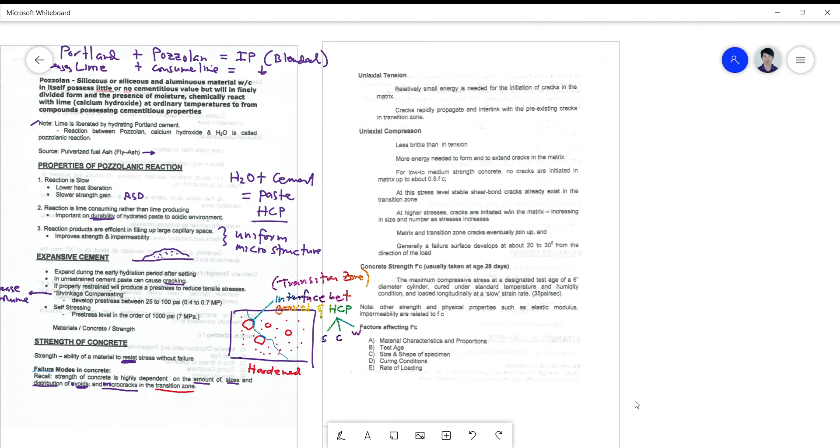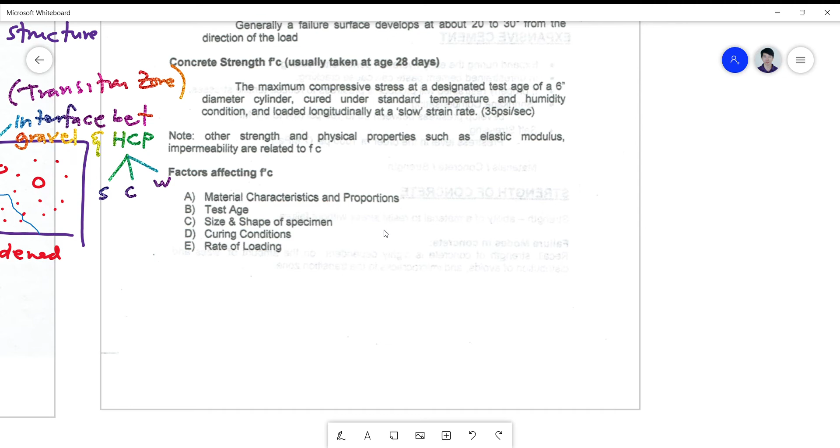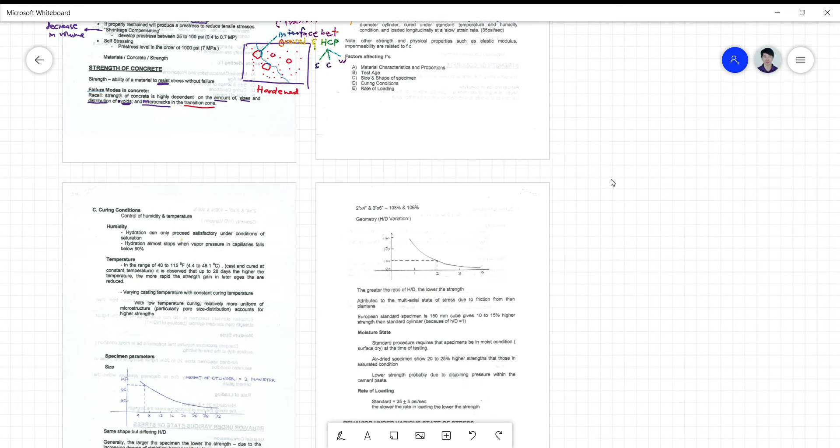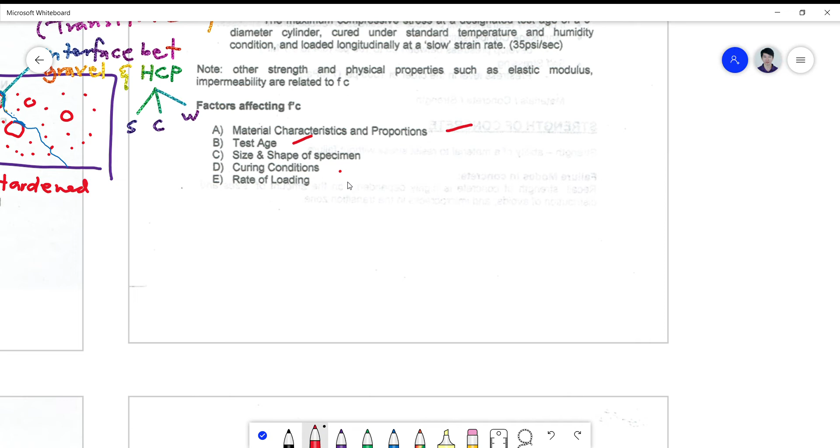Okay, last time we discussed the factors affecting the strength of your concrete. We finished up to the size and shape of your specimen, or rather the test age. We're going to discuss a few more on size and shape, but we have practically finished the material characteristic and proportion, and the test age. So we now continue on curing condition first, then discuss a little more on size and shape, and the rate of loading.

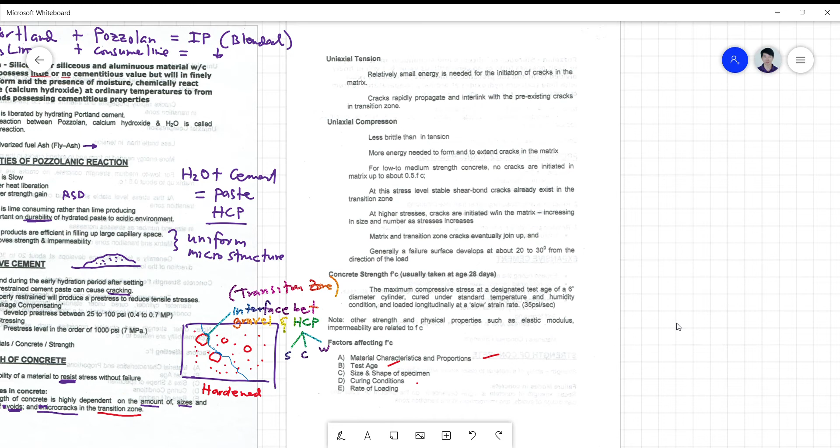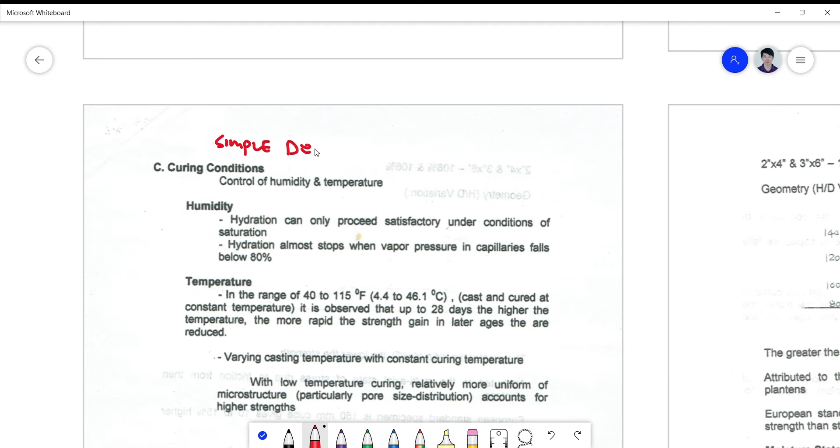So for the curing condition, in simple definition, we define curing as simply the control of both humidity and temperature.

On humidity control, our ideal humidity is 80 to 100%. For temperature, this varies depending on the temperature of casting and curing. So there are two types of temperature control we are into: the first on the casting, and the next on the curing.

Humidity in hydration must always be satisfactory, ranging from as high as 100% to a minimum of at least 80%, or else hydration stops. So hydration stops when it goes down. Curing uses a lot of water, that's why sometimes we don't pay attention to it.

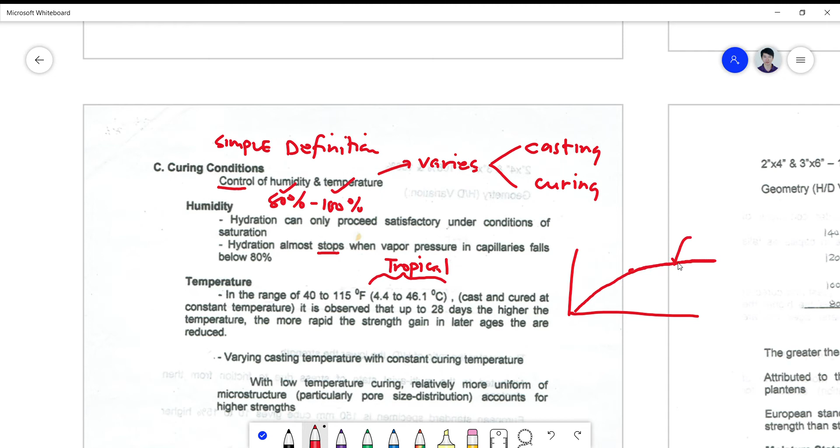In this temperature range, it is observed that up to 28 days, the higher the temperature, the more rapid the strength gain, but in the later ages this gain is reduced. So what does this mean? When we're at the upper boundary, there's a reduction in strength gain. If our graph for strength gain looks like this, at the later ages, the increase in strength gain is more rapid here, but then it goes down a bit. So this is strength versus time - that's how our graph looks.

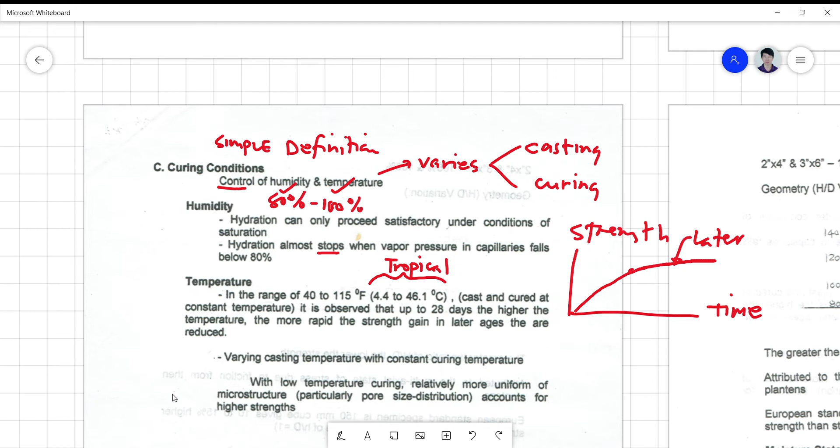So varying casting temperature with constant curing - these are problems in tropical climates when it suddenly rains. The temperature drops from a very high level to a somewhat lower temperature, but the difference is not that big.

So this is now your observation on the condition, where the temperature of casting varies while the curing temperature is set. Meaning your casting temperature is not the same, but when you cure it, you maintain a constant curing temperature - you have to see to it that during rainy seasons, your newly poured concrete must be controlled as far as temperature is concerned.

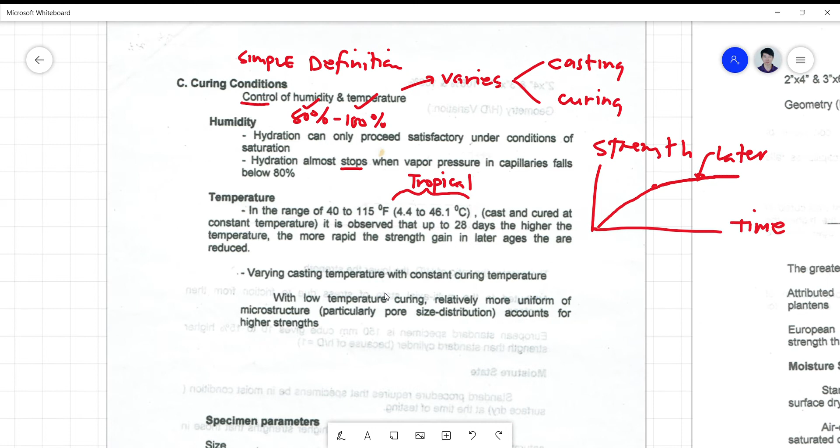With low temperature curing, a relatively more uniform microstructure accounts for a higher strength. So we prefer that our curing procedure is done in a cooler environment.

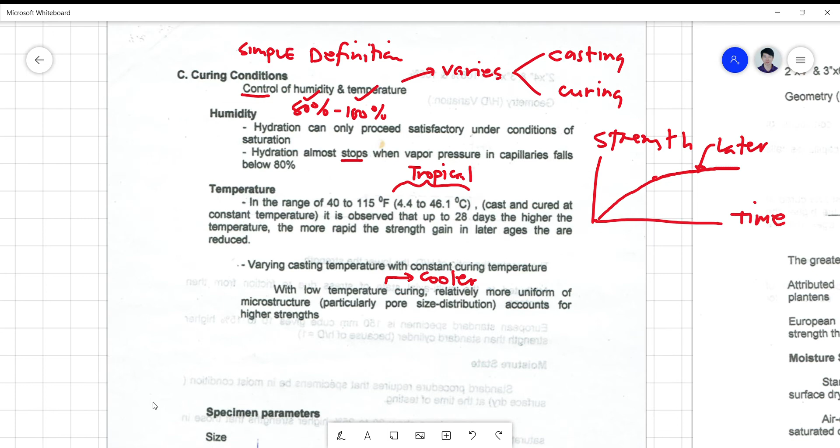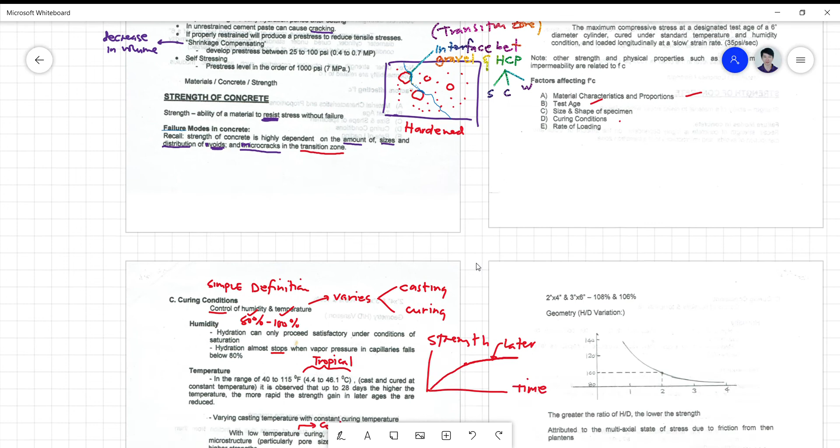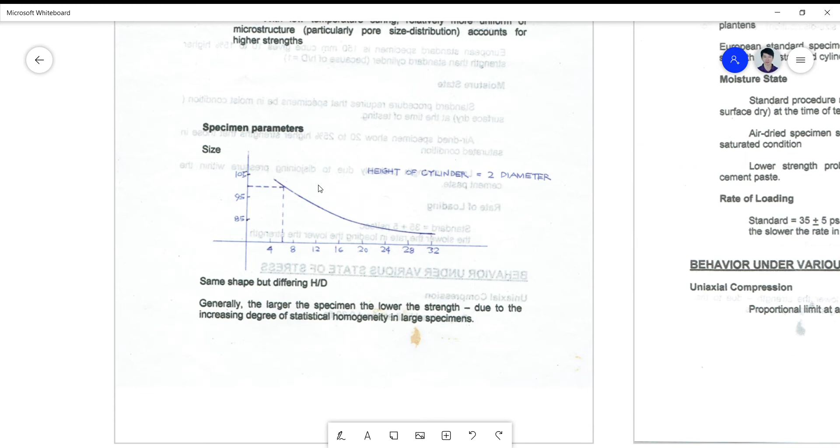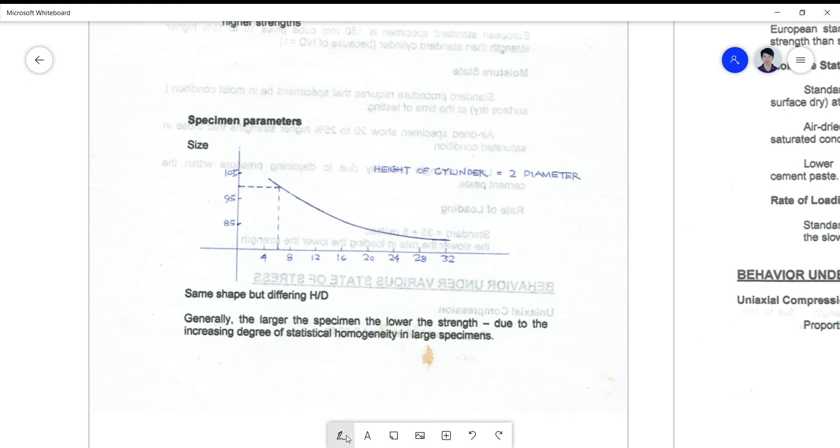Let's go back to the part we haven't discussed yet on the size and shape of our specimen. We're now on shape - we only discussed size earlier, and that was just the general part, under material characteristics. We haven't gotten to the size and shape of the specimen yet. For the size and shape of the specimen, we're talking now of the laboratory sample we are preparing. Normally, the specimen is a cylinder with height equal to 12 inches and diameter of 6 inches.

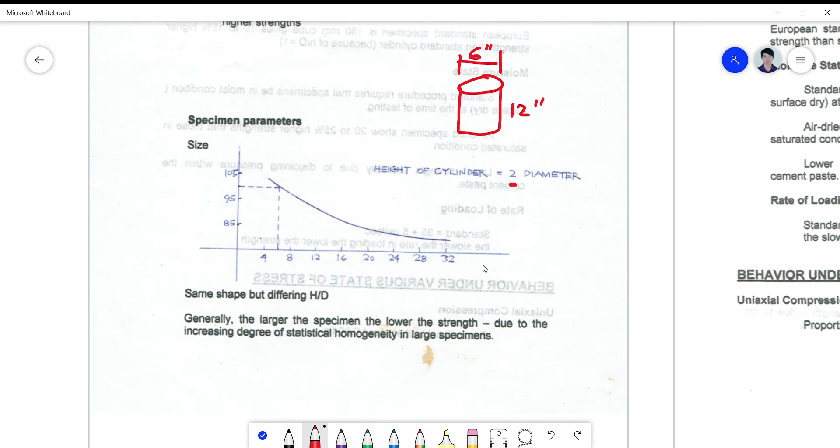So if we look at the size, this is now the standard: 12 divided by 6 is 2, so it's 2 times the diameter. That's our standard. So if we look at the size, this is 6 inches diameter - this is the size or diameter.

When the diameter is increasing, the strength is decreasing. So if you want to cheat on the test, decrease your diameter, because that makes it stronger. So, same shape but differing H over D.

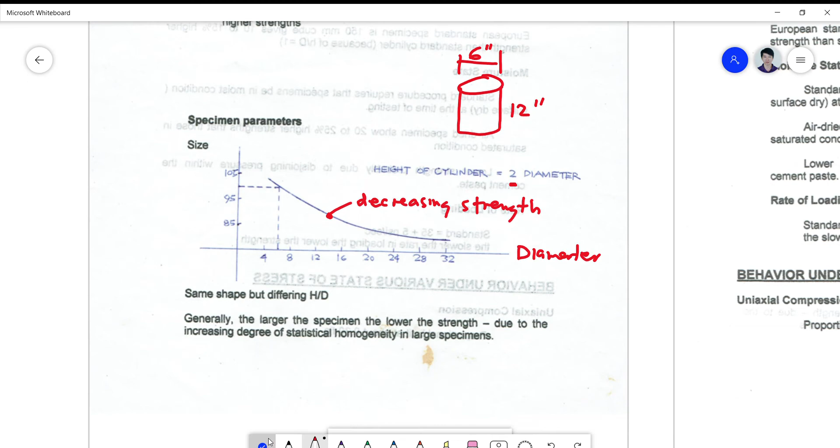Now we look at the ratio of H over D. The ratio here is 12 over 6 - this is our standard, so 2. Now this is H over D is 12 over 6, the cylinder is 2.

So if you test now on a cube where H over D is equal to 1, you expect a higher or stronger concrete specimen. The lower the ratio of H over D, the higher the strength. So a European 150 millimeter cube is 10 to 15% higher in strength than the standard cylinder because H over D is equal to 1.

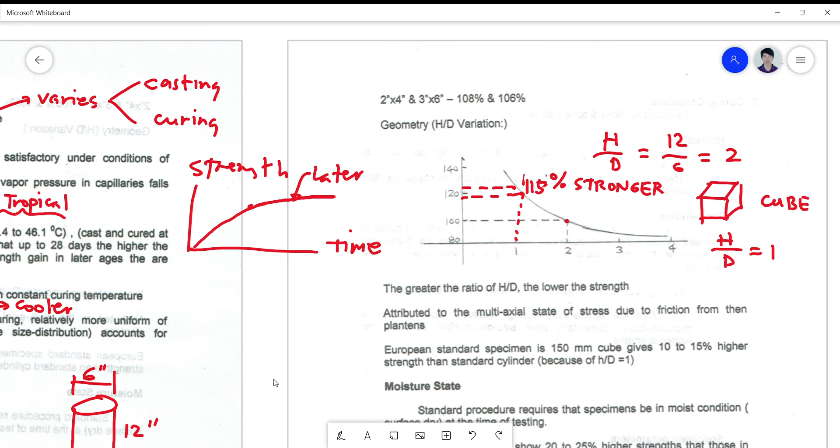Moisture state. Standard procedure requires that the specimen be in the moist condition, surface dry at the time of testing. When you say moist condition, it must be surface dry, but inside the specimen there is moisture. Air dried specimens show 20 to 25% higher strength than those in saturated condition. This is because of the pore pressure buildup - there's water pressure on this, causing higher strength.

When saturated, lower strength is probably due to the disjoining pressure within the cement paste. The rate of loading is 35 plus or minus 5 psi per second. So if the rate of loading is lower, it will lower the strength. If it is faster, it will increase the strength.

So slow rate of loading will decrease strength. When the loading is fast, it will increase the strength, and this is the standard. When you say slow, less than 35. When it is fast, greater than 35.

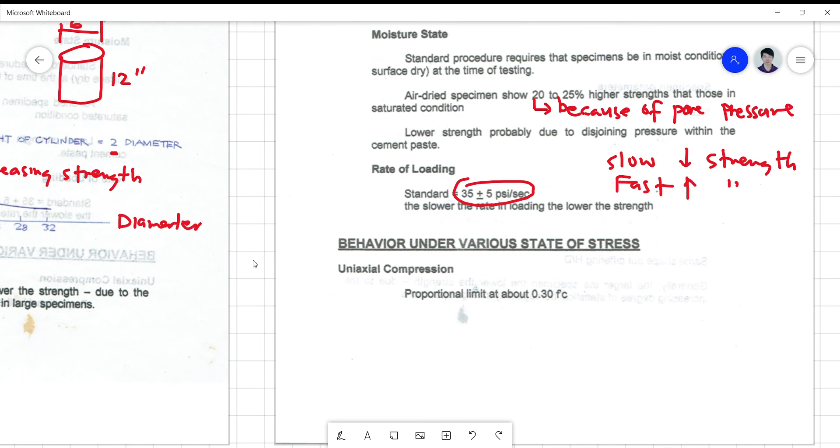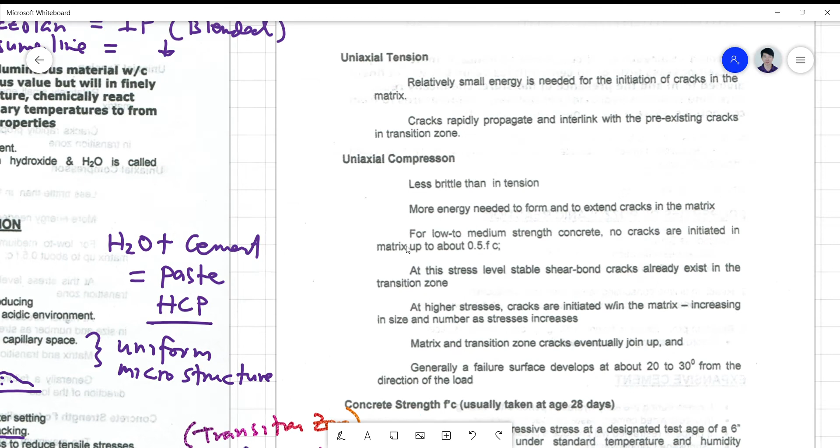So let's discuss now the behavior on the various states of stress. But before that, I'd like to present to you the uniaxial tension energy description. We know that concrete is weak in tension, but strong in compression.

So why? The reason is that the propagation of cracks is more rapid in tension than in compression, because there is already an initial crack. You need only a small amount of energy to initiate cracking of the matrix, so cracks rapidly propagate and interlink at the transition zone. For uniaxial compression, it's less brittle than tension because more energy is needed to form and extend cracks in the matrix.

For low to medium strength concrete, no cracks are initiated in the matrix up to about half of FC. So if this is your stress-strain curve, at 0.5 F prime C, cracks are not yet initiated, meaning there are already micro cracks in the transition zone and some capillary voids, but there are no force-inducing cracks yet within the matrix.

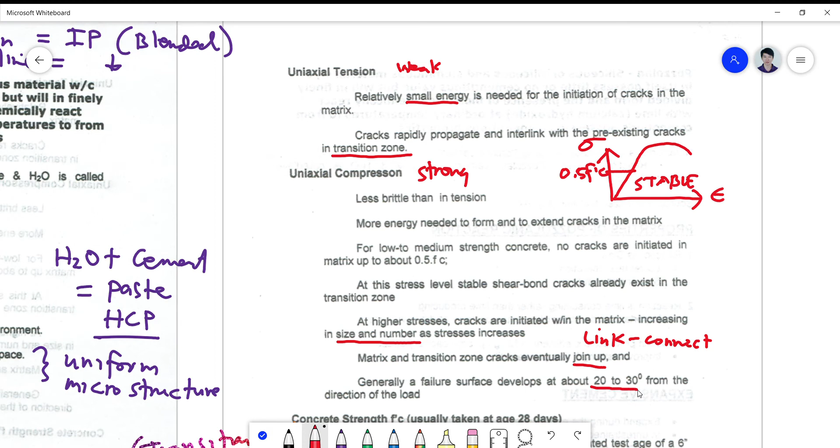So there is linking - interconnectivity, linking or connecting. Your micro cracks will connect with your transition cracks, your capillary voids will join, and suddenly a general failure surface will develop at around 20 to 30 degrees from the direction of the load. That's how uniaxial compression behavior emanates in the

test procedure. So concrete strength is usually taken at 28 days age. This is defined as the maximum compressive stress at a designated test age of a 6 by 12 cylinder, cured under standard temperature and humidity conditions and loaded longitudinally at a slow strain rate of 35 psi per second. Note that other strength and physical properties such as elastic modulus and impermeability are related to FC.

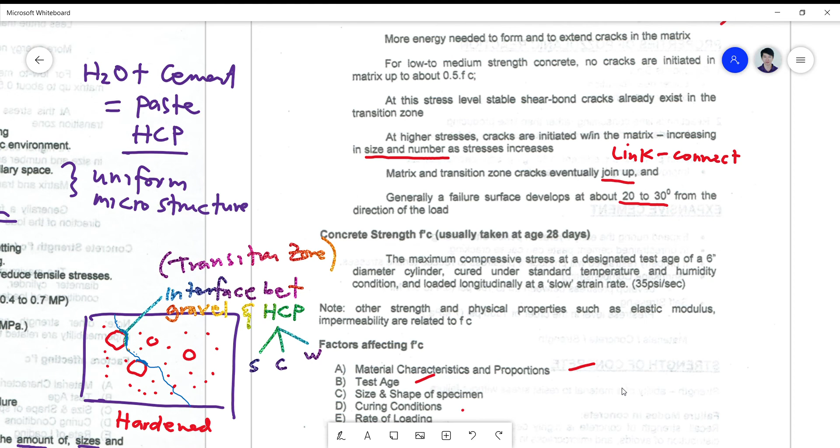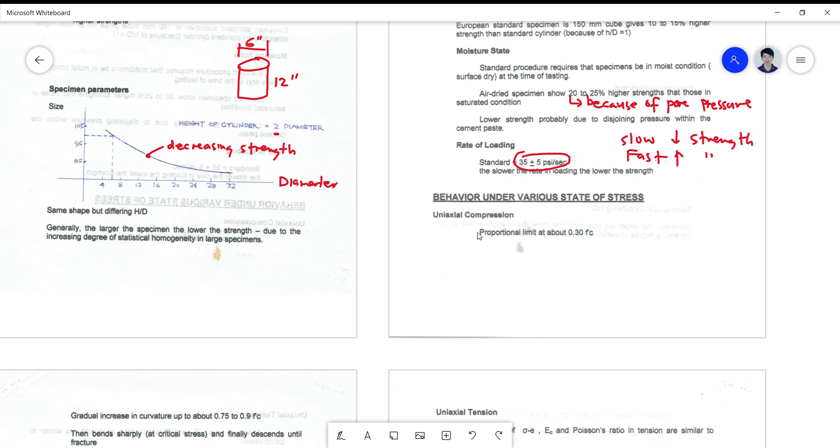Okay, so this finishes all the factors now of the strength of concrete. So let's move to our last topic, the behavior under various states of stress. So we focus more on the uniaxial compression. First, in the uniaxial compression.

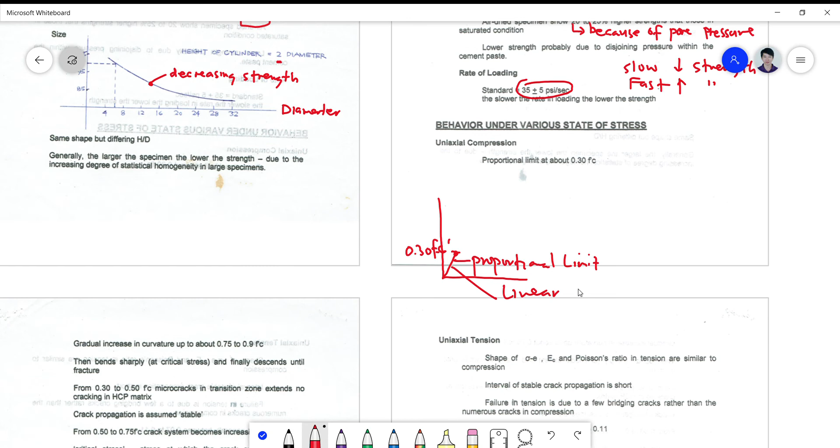So your proportional limit is actually within 30% FC prime. So remember that, at 30%, this is your 0.3 FC prime, you have what you call the proportional limit. So when you say proportional limit, this is the straight line, this is your linear, stress versus strain. So this is strain and this is the stress.

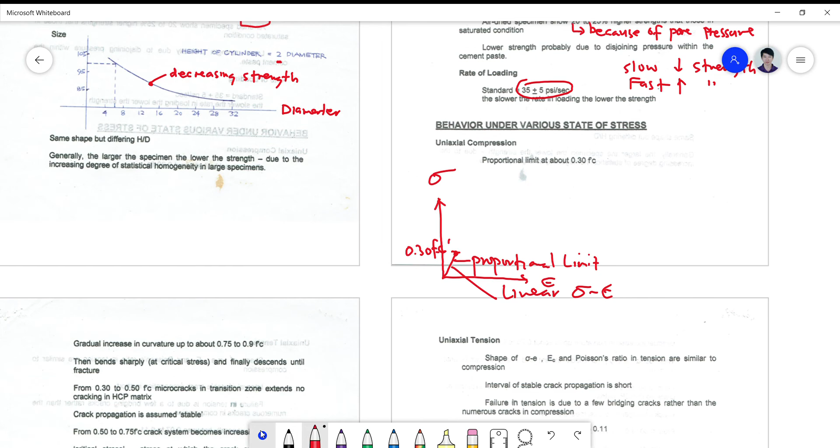So the straight line gradually curves up when it reaches about 75% to 0.90 of FC prime. So we're talking here of FC prime, so just put the prime there. So then it bends sharply at a critical stress and finally descends until fracture.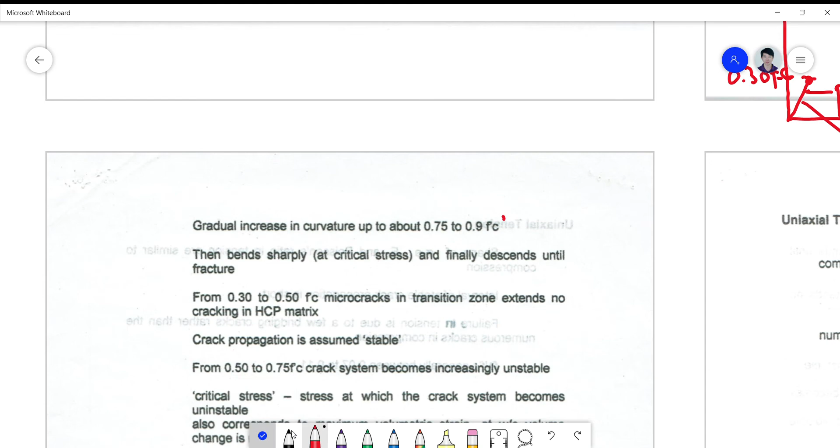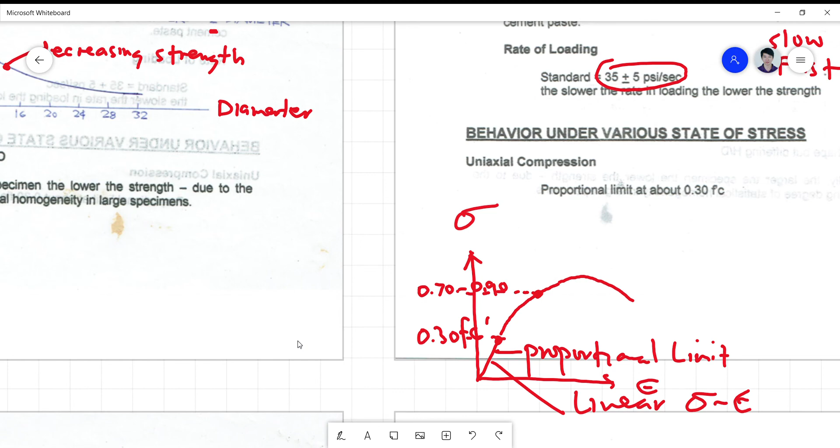So you will see now a gradual curvature here, and then bends sharply somewhere here, at about 0.75 to 0.90 of your FC prime, and then something like this. So this is how your concrete stress strain curve looks like, as defined here in our behavioral graph.

So from 30 to 50% FC prime, micro cracks in the transition zone extend, with no cracking in the HCP matrix yet, so this is still a stable condition.

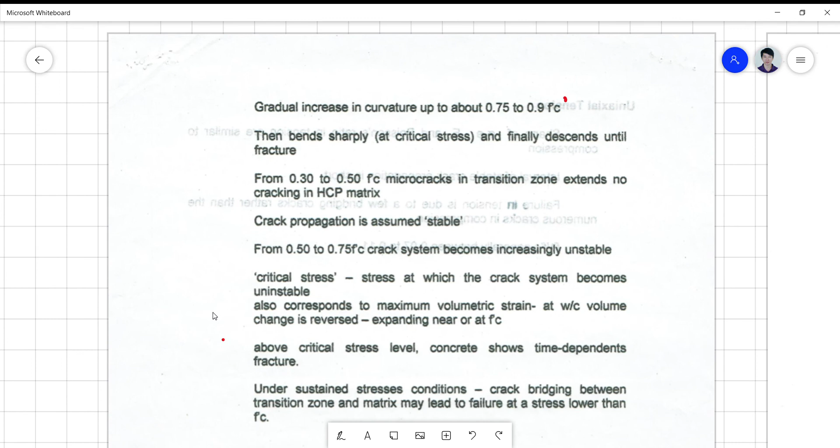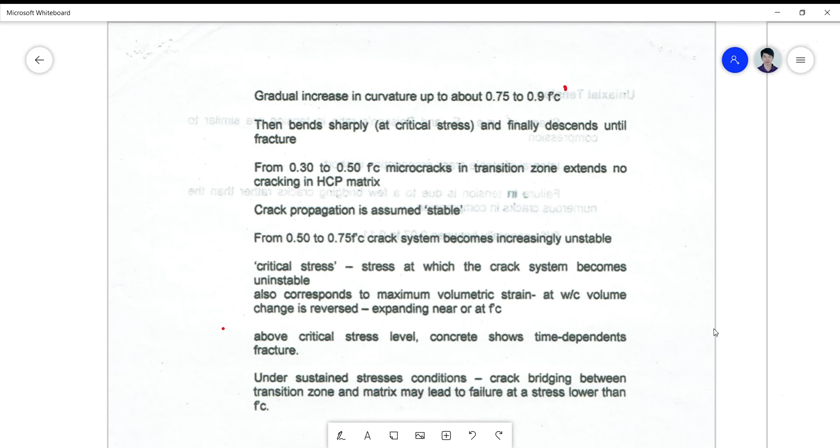But from 0.50 to 75%, the crack system becomes increasingly unstable. And here we can now define what you call the critical stress, the stress at which the crack system becomes unstable, which also corresponds to the maximum volumetric strain at which the volume change reverses direction, expanding near or at FC prime. So above the critical stress level, concrete shows time dependent fracture. Under sustained stress conditions, the crack bridging between the transition zone and the matrix may lead to failure at a stress lower than FC, since sustained stress conditions mean that your loads are permanently present.

For the uniaxial tension, the shape is similar, the sigma-epsilon relationship is similar, but in the other direction, of course. And the interval of stable crack propagation is shorter, so the crack propagation is abrupt and sudden. So you have a brittle failure in case of uniaxial tension. The failure in tension is due to a few bridging cracks rather than numerous cracks as in compression. So normally it's only about 7 to 11% of FC, meaning the F compression and F tension relationship is only good for about 7 to 11%.

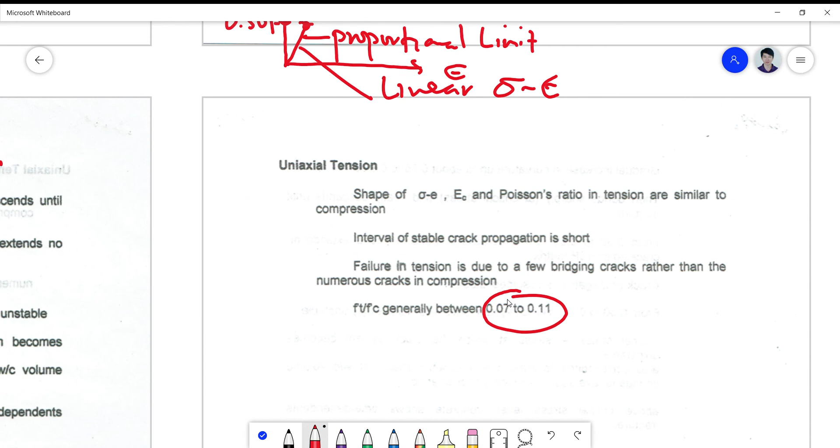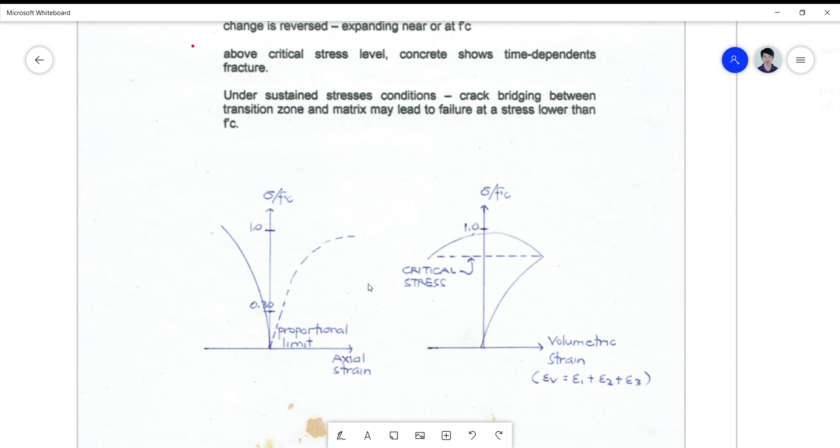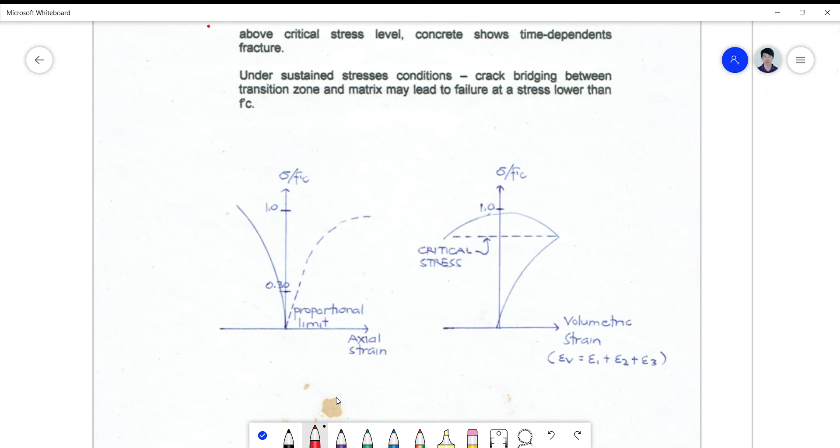So if you look into the graph now, this is now your graph. Here is your proportional limit at 30%, and here is still the stable part, 0.50. So here your concrete is still stable, but there are already cracks on the transition zone, of course, that's inherent. Around 75% up to around 0.90, this begins to become unstable.

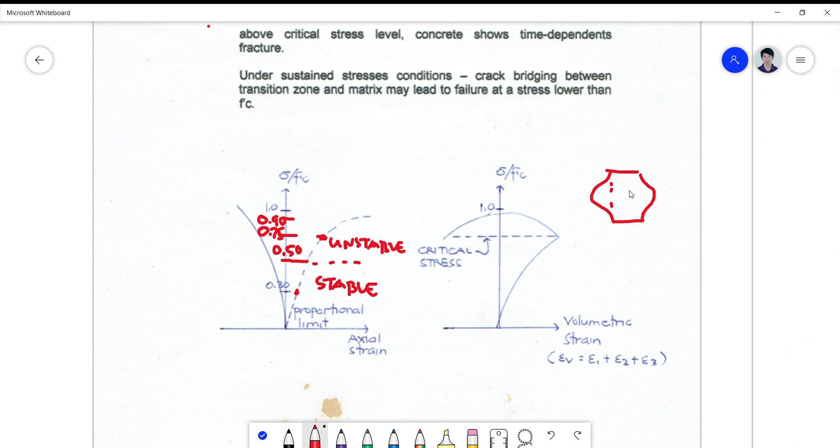So at a certain point, which is somewhere at 0.75, there will be a reversal in the nature of the volumetric strain, wherein your concrete will now have a negative strain, due to the fact that at that point your cylinder will have a shape like this. Originally your cylinder is straight up like this.

So the lateral strain and the longitudinal strain here will no longer be positive, because epsilon longitudinal, or let's call it epsilon 1, and these are epsilon 2 and 3, are already greater than epsilon 1. So epsilon 2 plus epsilon 3 is greater than epsilon 1. If that is the case, your epsilon 1 minus epsilon 2 plus epsilon 3 is negative. So there will be now a change in volumetric strain, going down to a negative ratio. This is a normalized or unit stress strain graph.

So you call this now the critical stress, ranging from 75% to 90%. We don't want to reach this high in working stress procedure, but in strength design procedure, I will teach you how to deal with this when we reach that.

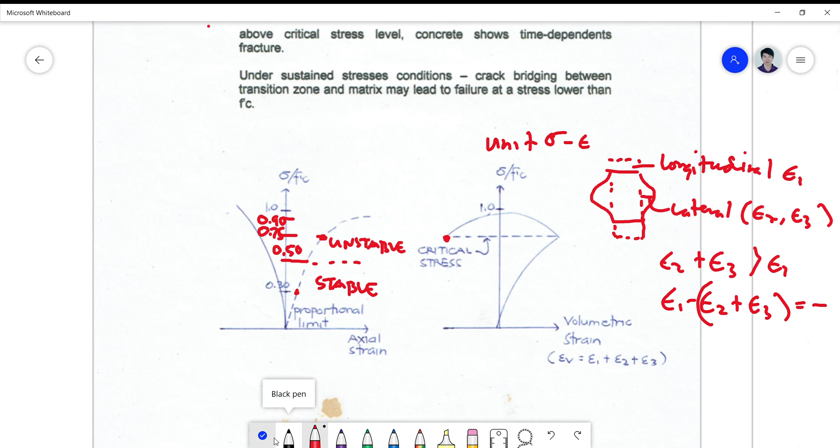Okay, so that ends my presentation, my lecture on concrete properties. I hope you understand the basic concepts in a simple language that I prepared and presented. Thank you.